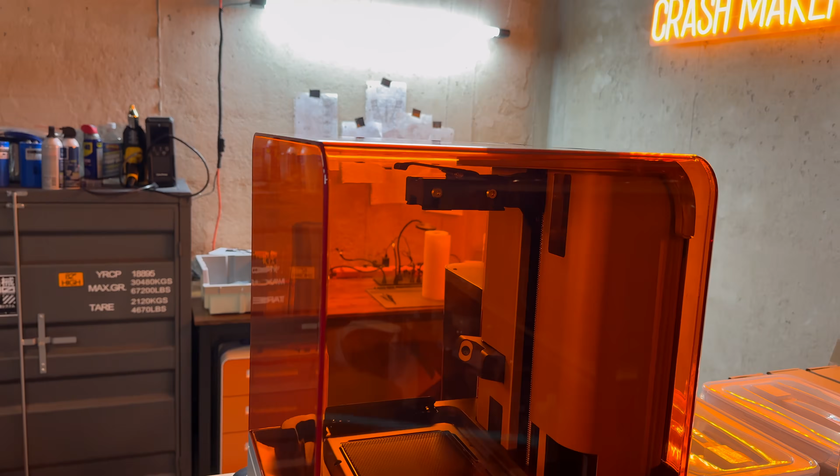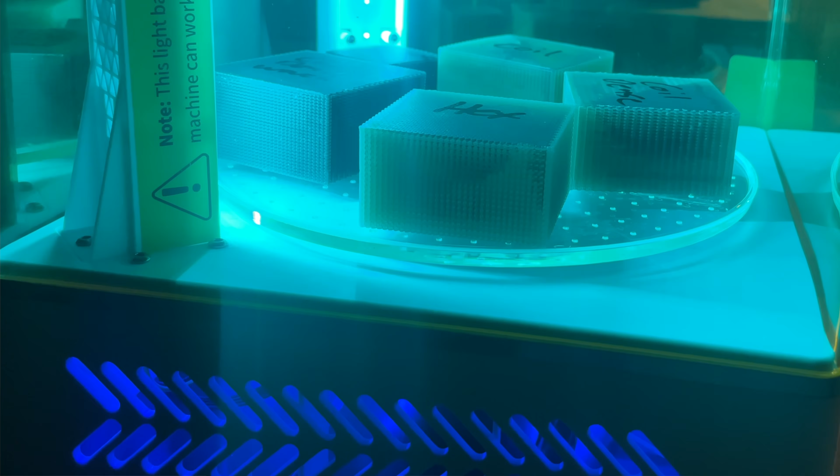So we're gonna continue off my previous research on lattice structures and improving a material's ballistic performance based on the geometries that we can basically configure these into. And the previous research that I did was just going up against a 22, which is still actually, surprisingly, I know that 22 is kind of laughed about in some cases, but that's actually a lot of energy to be stopping with hobbyist resins like I was using.

So I was just using a standard SLA printer. And again, these printers are just designed for things like figurines for D&D and whatnot, never intended for engineering use case, which is why I was still pretty pleased to see the results that I got, which is why I was able to still further my research enough to have PCBWay print out of steel one of those lattice structures.

And it did perform really well in that armor plate that I did, beating out traditional level 4 armor plates for not just the power it was stopping, but for how many multiple hits. Typical level 4 plates are only rated for 4 rounds of 308 or 7.62 AP, one each corner and center. And then this one stopped a total of 17 rounds, including 2 300 Win Mags close range, which level 4 are not rated for.

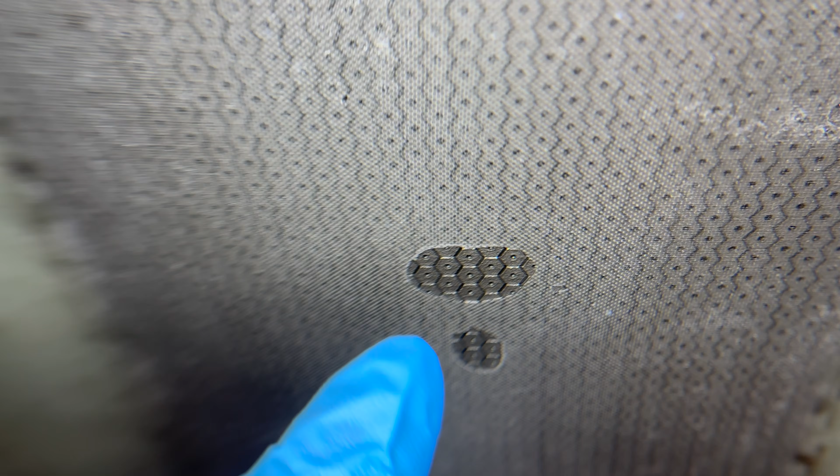So again, it's just a reminder to take the research that's presented and think about it beyond just the medium that I'm printing it in. Think about other use cases or how it could be embedded with other materials, and that's just how you take research. That being said, what are lattice structures? How do they make it better?

Just to really sum it up, if we have a solid cube like this resin block here, and I was to shoot this, what happens is that the material in here has nowhere to go. The round hits it and it will just shove it out the back. And with something like resin that's brittle, what you'll actually see is it essentially just fractures into large chunks and is totally useless for repeated hits. So it's not good at all.

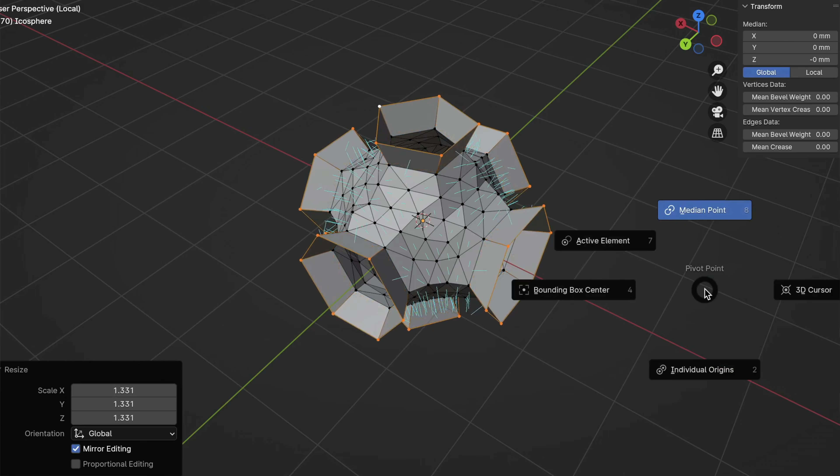But a lattice structure can basically allow energy dispersion throughout the structure via the propagation of a lot of small deflections that can occur throughout the designed lattice, such that more of the material can be contributing to stopping the round, basically allowing shear, compression, and tension-based forces to all contribute more effectively to stopping the round.

So now we're gonna go over and do some ballistic tests of these panels, but a disclaimer, don't try this at home. We are doing this in a safe area, and of course, following firearm safety procedures. Now, I did want to call out at the time of this recording, it's totally legal and perfectly kosher to have a brace on this platform. I just have it on here so I can make sure that I have consistent tests. But of course, if any local laws or regulations change, I can easily detach this and have it destroyed in accordance to those, if anything changes in the future.

It did hit a little bit lower, so the sight needs to be raised, but I'm not going to do that quite yet. I'm going to shoot the other cube in the same spot just to make sure we have a consistent test. It didn't do very well at all. We got a couple large chunks, a bunch of small pieces in there. It didn't effectively transfer it. We just got that energy dispersion through these large crack lines and then darted a couple inches into that clay.

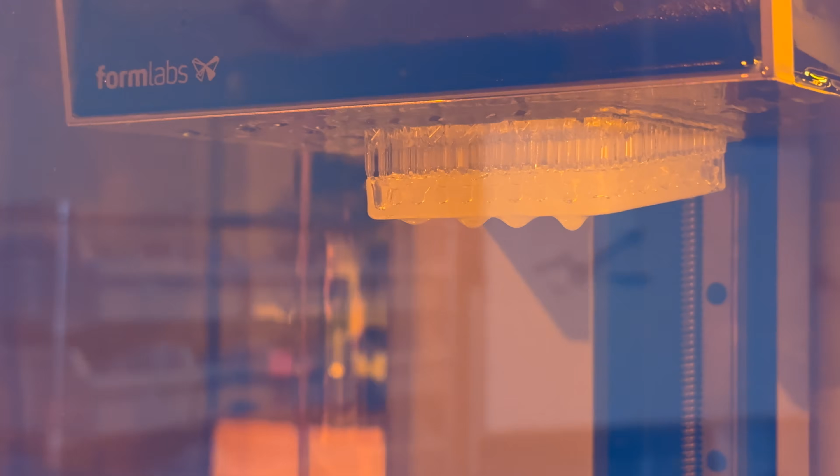Now, I've had my eye on Formlabs for a while because they have quite a lineup of very interesting resins, a lot of different characteristics, whether it's fireproof or they have some that are flexible. But these are the two that I'm trying today. I'm going to try Durable Resin V2 and I'm going to try the Tough 1500 because those seem like the best options for these lattices.

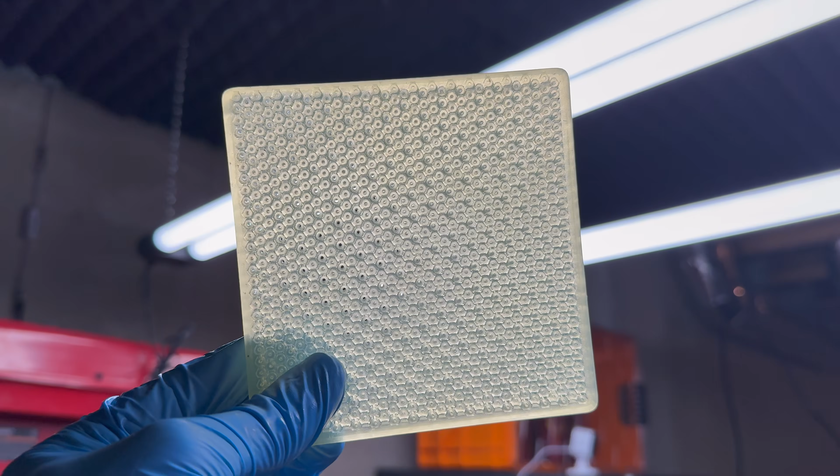Now, I don't expect that any of these are going to stop the 5.7, period. It just has a very high penetration capability. But I do have some 7075 aluminum, which is an aluminum alloy that's known to be very strong. So I'm likely going to have to put 1 or 2 layers of that in front of these lattices, and we'll basically use the lattices as a final line of defense or a really strong impact pad. That being said, I do expect the resins to stop the 22. I just don't know to what degree yet.

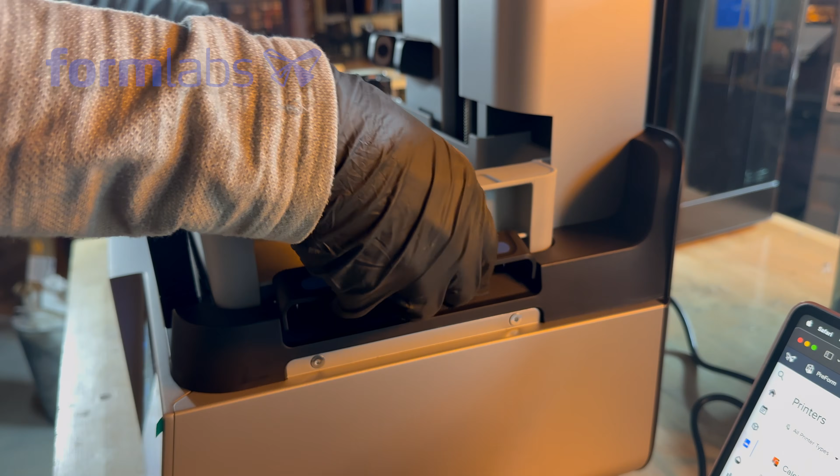First, we're going to set up the resin tray. Simply just drop it in place, lock it in, and then you remove the UV filter on top. We're also going to install the wiper. This is going to make sure that the resin is evenly distributed throughout the print. And then I did attach the print head up above.

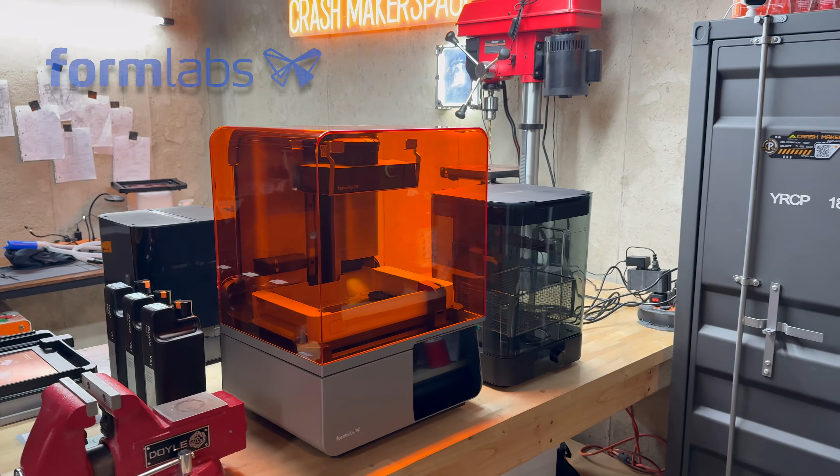But this is the full set with the wash, cure station, Form 4, and 3 liters of resin that they sent. Now we're gonna go through the basic setup. Really intuitive here. It walks you through step by step. And then you can insert the resins by simply venting the cap and dropping them in place. The printer will monitor the weight of that to know how much is left. And that's all there is to get this up and running.

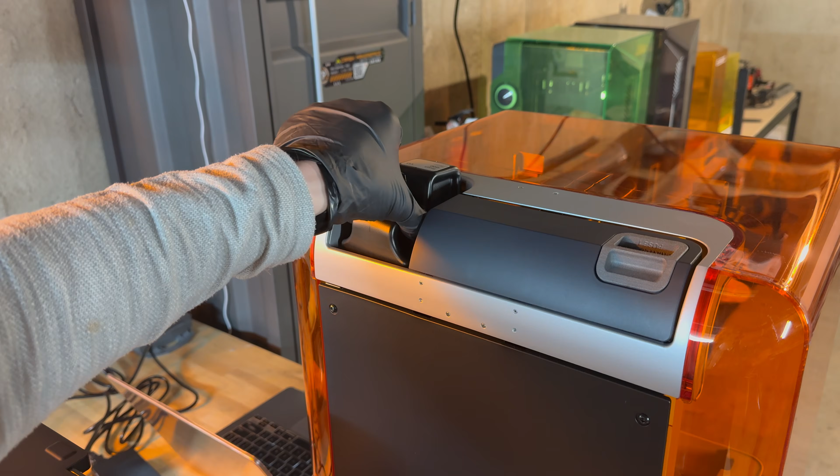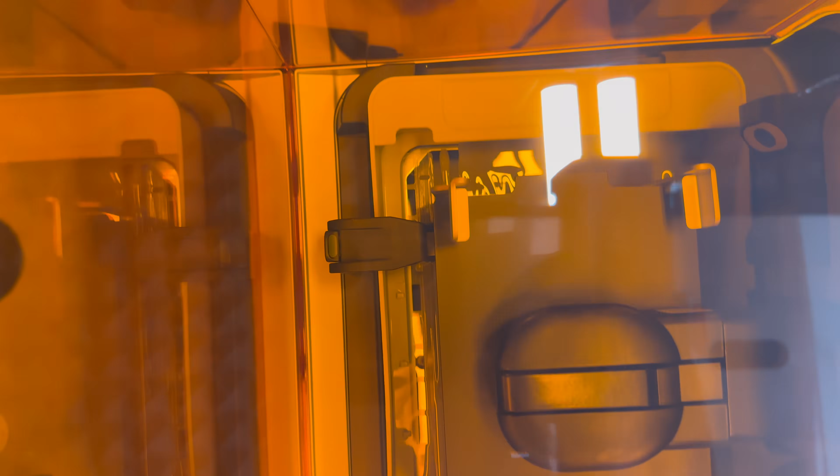Now I did of course install PreForm. This is Formlabs' slicer program. And I just dropped my lattice in there. And this app is also a testament to their engineering or even programmers' abilities. It was able to patch my model way better than Chitubox or Lychee slicers have been able to, because they can have some holes in those meshes I have to tune, but this one just worked. It did an awesome job and even has a one-click option, which has worked for me every time I've printed

with this thing. None of my prints have failed with this, and even when you swap out the resin, the printer knows what type of resin it has loaded up and relays that to PreForm so that PreForm automatically applies whatever settings are optimal for the given resin that's loaded, making this by far the most polished and tuned printing experience I've ever had. Like, every little detail they've thought about and tuned really well.

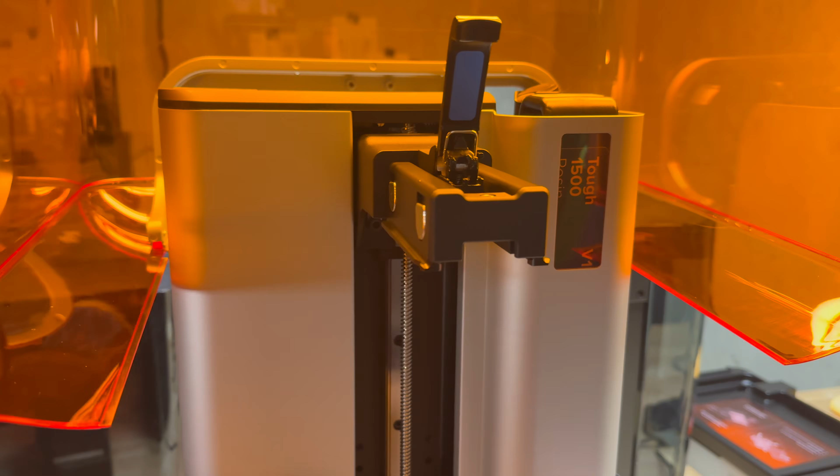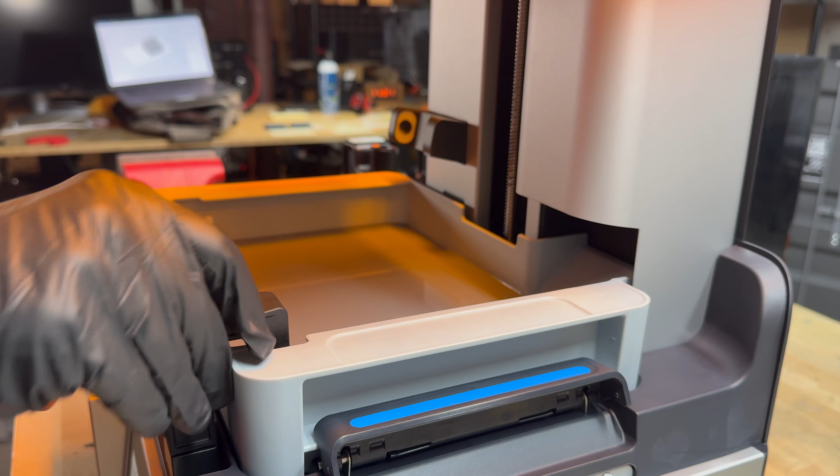Another unexpected piece is it also shows you at the end of the print exactly how long to wash and cure your part for. No more having to hammer and scrape your parts off, simply push these in and it pops it right off. And they also sent me another resin tray, so I have one for each type of resin. This way, when I swap resins, all I have to do is pull one tray out, put the other tray in, and they give you stickers as well so you can label them accordingly.

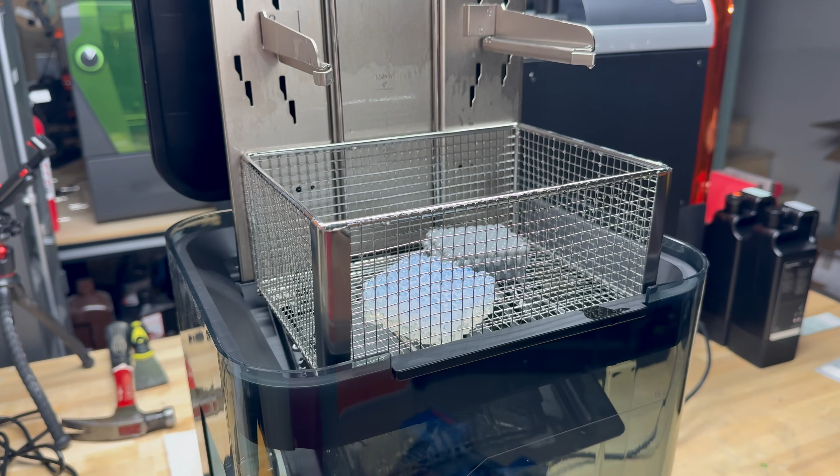Now, just grabbing the backing of the support material and squeezing it, I can feel that there's pretty good stiffness on the durable resin, but it's really flexible. It's not brittle at all, which is pretty encouraging for something that's going to be impacted. Whereas the Tough 1500 is definitely stiffer, but it is brittle. It actually broke with a similar test. So we'll see, maybe the durable does better, but we're gonna wash these now.

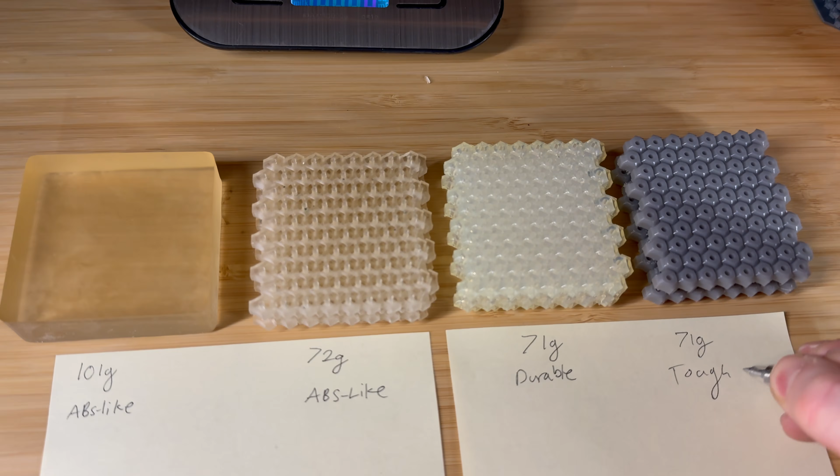Then of course I cured it to the specs, and we now have our two lattice structures for testing. Now the durable print has a really neat, like, opalescent look to it, but let's go ahead and shoot it and find out for sure. Okay, so we see the round entered in the face, a little bit of cracking, so it did hold together pretty, yeah, okay. So we have a little bit of backface deformation here, but clearly their tough resin is tons better than the alternate stuff that I was using.

So let's go ahead and switch over to the durable and see how that does. There's no way. That is stopped completely on the surface. It's literally sticking out of the material. And there's no backface deformation. All right, since that did so good, we're actually gonna shoot it again because there's no fracturing. So let's see how it handles another impact. No way.

Dude. Taking two shots like that, I mean, there's a little bit of cracking going on right between them, there's a little fracturing, but still, to have the second one sticking out even further than the first one in that close a proximity for something that's 3D printed, oh, that's disgusting. In a good way. Let's try something that's not the 22. Let's bump this up to the 9mm full metal jacket.

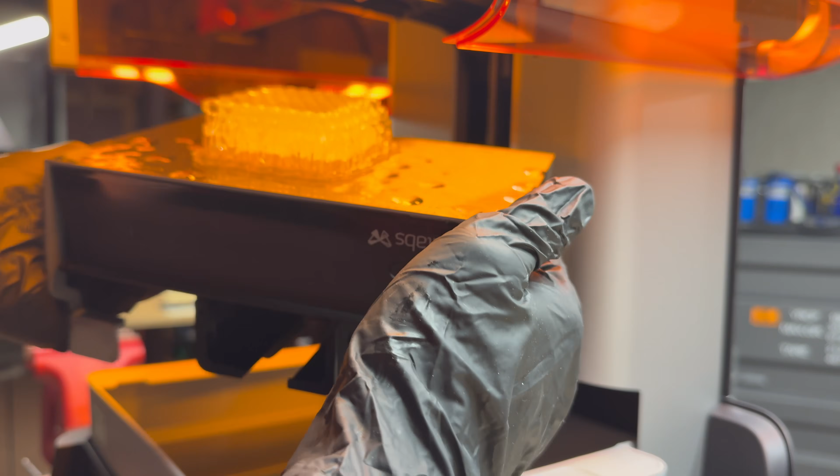Now, I know that this is gonna go through that 20mm of material for sure, so I actually, just for kicks, printed another one. So we have two of these 20mm lattices, and I'm still reusing the one that we shot twice with the 22 because it just had one little crack in it. And we're gonna see what happens. So obviously, yeah, huge hole, but the round is totally intact down there.

The round came through, and then I actually just shoved this out of the way, so it came up, and it just darted downwards. So it came in, and obviously, big cavity here, but it's funny because it's totally intact, because it's going through much softer mediums, of course. So we know that of these two resins, durable is definitely the best. So I'm gonna keep tuning for this one in particular, but 20mm is way too thick to be stopping a 22. So I'm gonna thin this out to just be 10mm thick.

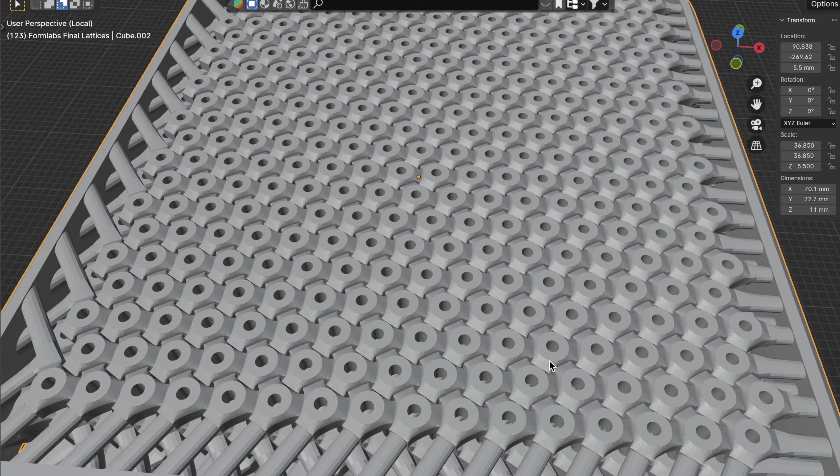And I'm actually gonna do a technique that I've wanted to do with these lattices for a while now, which is doing a gradient-based approach. So materials with gradient, whether it's via composition or the actual structure itself, can exhibit optimal behavior for certain loads. But what I'm gonna do with this lattice is adjust it such that the node sizes scale back the further we get into the actual plate.

Now in 10mm, I can only fit 4 layers here. And we're gonna start with the front face having a much denser weave to impede the penetration, and then each layer going deeper, the node count is essentially reduced, but the bridges are then thickened. So we get a very strong backing that's gonna resist cracking and support that denser face in a gradient-based approach. Because again, in engineering, if you have sharp transitions, those are where things tend to break.

Now after printing this out and cleaning it up, and looking actually pretty neat, you can visually see that denser pattern in the front versus the thicker, coarser bridges in the back. So let's go ahead and hit this with that same round. I don't know, I mean, 10mm is pretty thin. Oh, it did stop it. So we did get some, it actually knocked a chunk back. We got that Hertzian cone, that classic shape did form there.

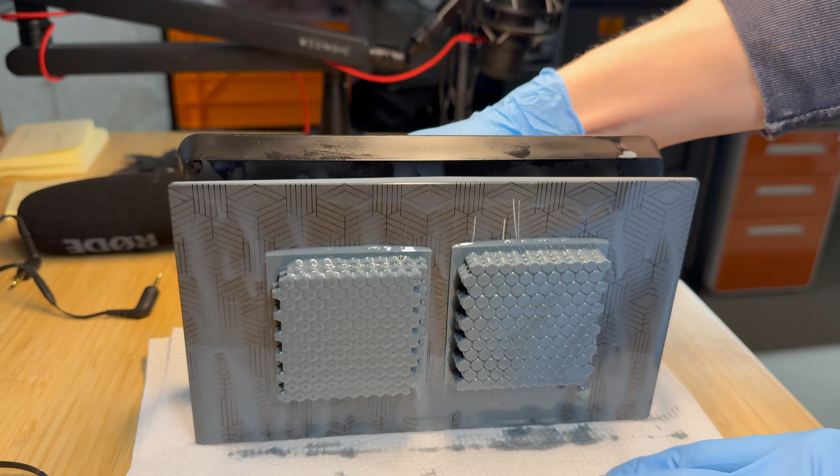Now, just to compare how strong this durable resin is from Formlabs, I printed out more of these 10mm cubes, but with the general resin printer with hobbyist, ABS, and regular resins. So John didn't even get a chance to shoot this one down here because it popped off. But again, this is just a .22 long rifle. This is what it's doing through those 10mm thick resin ABS-like cubes with typical hobbyist resins.

Now this one up here is your most common resin. This is like an 8K resin for figurines or whatnot, like here. And you can see it did the worst. That's the largest hole, which is funny to say because these are devastating nonetheless. And these are the ABS-like. So absolute garbage for any sort of ballistics, which is why this is still impressive. This is the Formlabs at the 10mm, and it still stopped it.

So the ultimate goal for this initial research is the 5.7. That's my target because it is harder to stop than the 9mm, which means that I can already smell the comments saying, but the 9mm is more energy, so it must be harder to stop. It's not the case. And just to prove my point, it takes like an hour to make, so I made a very basic composite panel. So there's no infills, nothing special with this.

But I'm gonna shoot it with a 9 a couple times, Full Metal Jacket, and you're gonna see that it's gonna be stopped each time. And I'm also gonna shoot it with a couple Full Metal Jacket 5.7. And you're gonna notice that both of those are gonna puncture through with no problem. All right, point it up, it's unloaded. So there you go. Got stopped. Now, yes, this would hurt, obviously, but the point is just showing that you can stop it with much less.

All right, open chamber. And there it is. Okay, I got the 5.7, and we're gonna get the 9 in there again just to show you that it wasn't weakened in that nearby area that let the 5.7 through. Ready? Stuck on here. But you can see again, got the same pocketed shape as before.

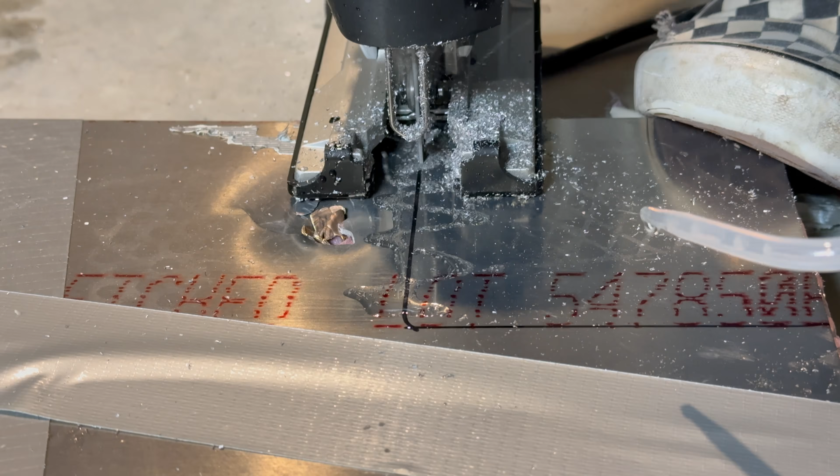Between 1 and 2. Yeah, you need that one little bit of backing. It just bored right through that. And once it got through this metal, it was no contest. So we now know that 2 layers is required for the 5.7, but just out of curiosity, I'm gonna put one of these aluminum plates in front of the plywood and shoot it with the 9mm to see if 1 is sufficient for that caliber.

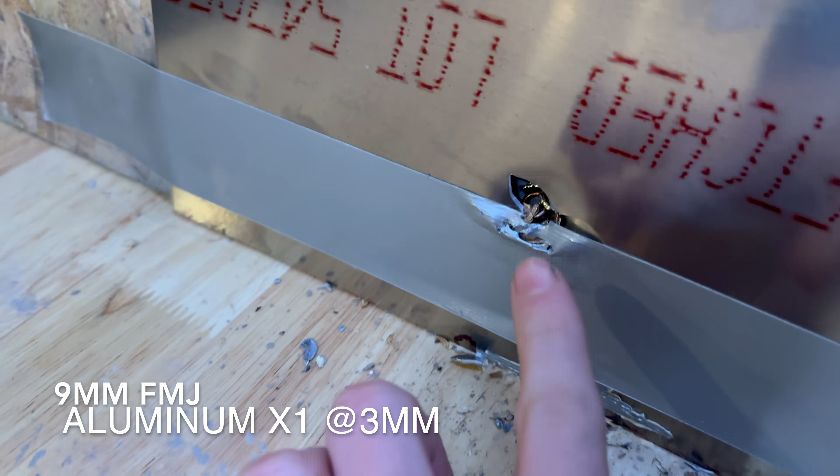So it's right there, and it actually didn't tunnel through like our 5.7 did. It ended up actually breaking off large chunks because it is a bulkier round, and it did shove some of these little pieces of the metal back, and then there's the ball, and it left the jacket behind stuck in the aluminum panel, and it's really in there.

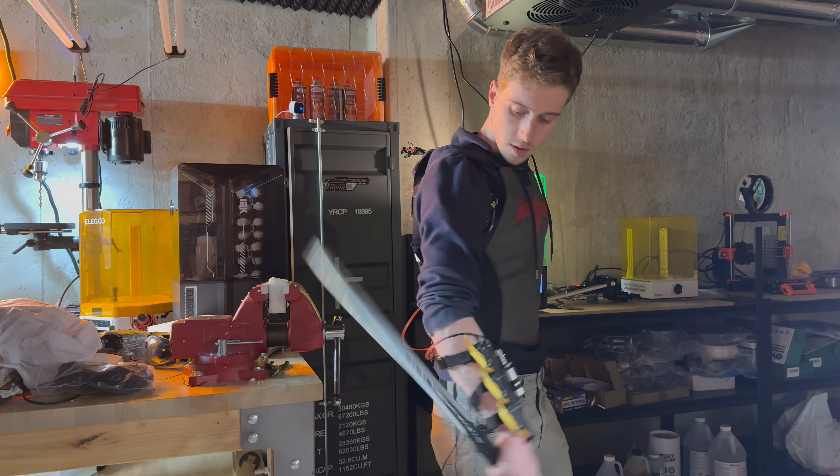So now my immediate idea is that I could use these in custom shapes as pads along my back, and also to help hold the holsters for my spinal battery cells away from my back. And then that got me thinking, I wonder if shooting one of these cells with this pad behind it would be enough to stop something like the 9. I really don't think it would stop the 5.7, but they are pretty thick, and depending on how densely they're wrapped, I might get an unexpected result. You just never really know with ballistics what you might see.

My hunch is it'd tear right through, but I think I'm gonna do that for my next video actually, because it shouldn't be too much research. I just have to make some custom pads with these lattices, so I'll have to mess with warping these panels into custom shapes while retaining the geometry. But beyond that, it should be a pretty quick turnaround. I don't expect them to catch on fire, but again, you never know.

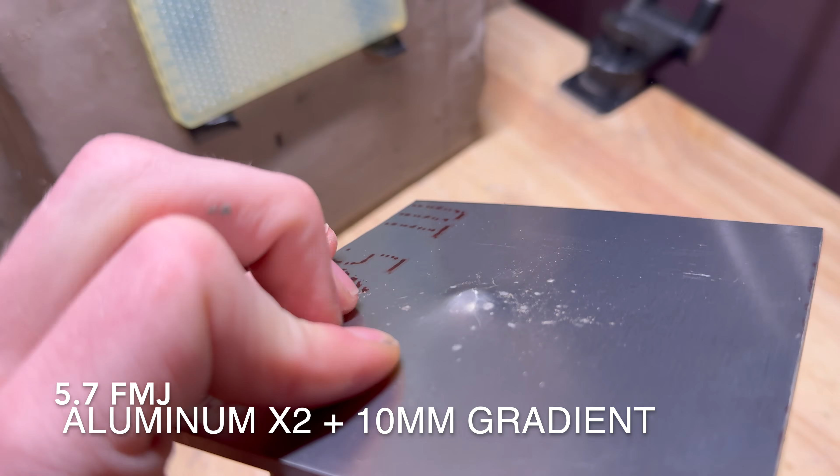Okay, so again, the 2 plates is really what it takes. Despite that pretty sharp push out the back here, it didn't actually fracture this material. What's crazy is it seems like it actually shoved clay through the lattice because there was so much pressure. See how this clay is showing up here? Obviously there was no clay between this, so it literally squished clay through this tight multi-layer gradient.

Pull this back here, and you can see that, yep, this did push out the back as well. It transferred some of that energy back. But the good news is this is not fractured at all. So it could totally take some repeated hits here.

So I hit it on the lower side, so that's where it struck. And then there's the dent. Definitely a little bit lower shot. It's pretty challenging with that silencer on there because it totally blocks the iron sights. And it did knock off a chunk here. It obviously did not penetrate though. It was just a lot of force, and it was, again, a little bit lower.

So it was a lot of force at the edge of this, so it was unsupported, and we did get that little bit of crack here. So we got a bigger dent as it pushed down and away. So the aluminum is doing the heavy lifting, and of course you would want some sort of fiber composite or something on top of this to reduce the spall and ricochets that happen on plain metal.

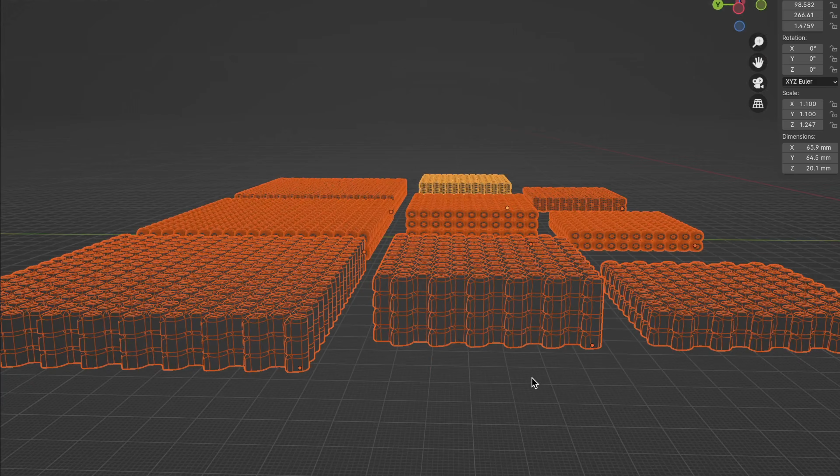Now, I'll see you next time when I bring the 5.7 against these lithium iron phosphate cells that I have here. These will be going on my spinal battery version 2 that I'm working on in the background. And as mentioned, I'll put these gradient lattices behind them just out of curiosity to see if the cells with the gradient lattice provide any sort of ballistic protection against potential handgun rounds.

So I hope that you enjoyed this research. It was definitely a lot of fun trying these different calibers, trying my gradient lattices with Formlabs machine, and shooting some aluminum, because I've never done that before.